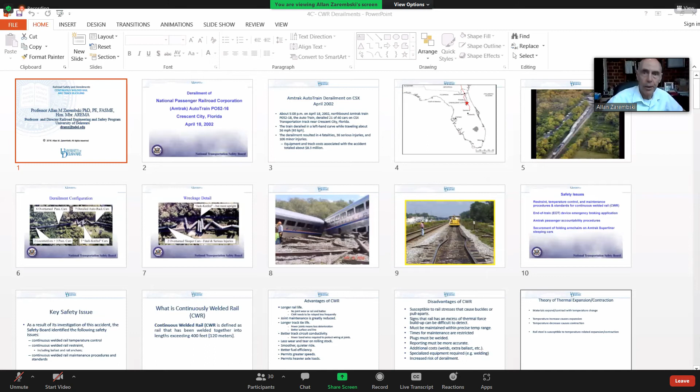So the last item I want to talk about, and an hour won't give it justice, but I'll try to introduce you to it, is continuously welded rail and track buckling. I showed you the movies earlier, so I won't review them, but I'll talk about the maintenance of continuously welded rail, which is a big deal throughout the world, but becomes especially significant in places like Israel because of the temperatures and generally warm weather.

Just to get things started, there was a major track buckling derailment on Amtrak in Florida back in 2002. Like many track buckling derailments, it happened in the middle of the afternoon in the spring. Unlike the normal expectation that you get most track buckling on the hottest day of summer.

Very often we find the most track buckles occur in spring because you've just gone through a winter cycle. People have done maintenance and haven't readjusted the track to account for the proper temperature for laying the welded rail. It's very common to have derailments in spring or early summer, and 5 o'clock on a spring or summer day is still pretty much in the heat of the day.

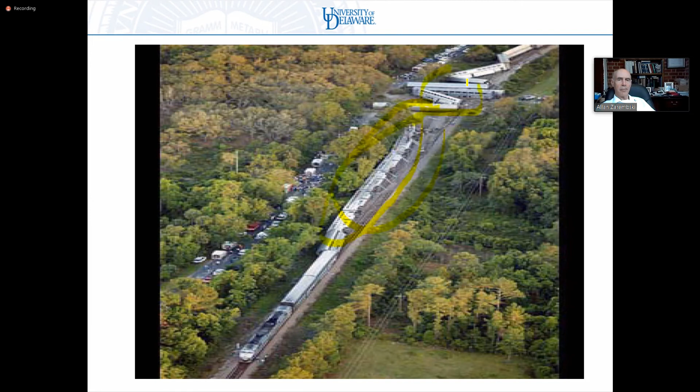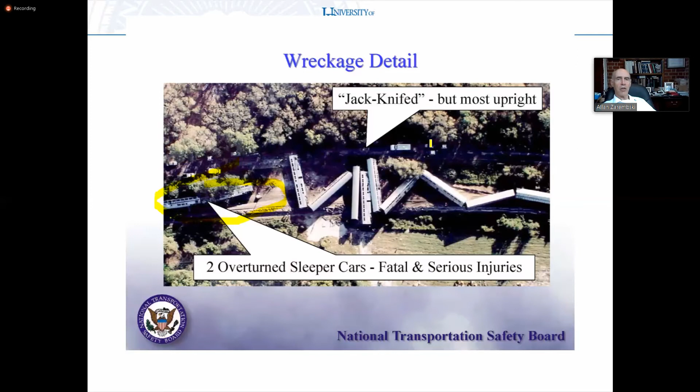Again, the fatalities were in this overturned sleeper car. As we talked about before, when a car goes over the side, that's when you get most of the injuries. If the car stays upright, you get fewer injuries.

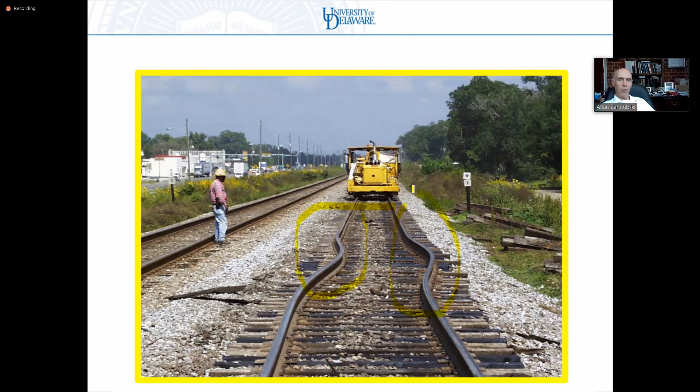A track buckle is a lateral misalignment of the track due to high thermal forces. I'm going to come back to this after we talk a little about CWR and what the issues were, but the main issue was maintenance procedures and maintaining the proper neutral temperature of the rail and any maintenance done on the track.

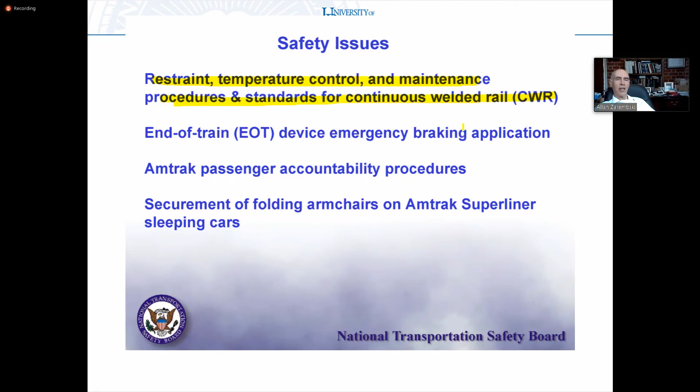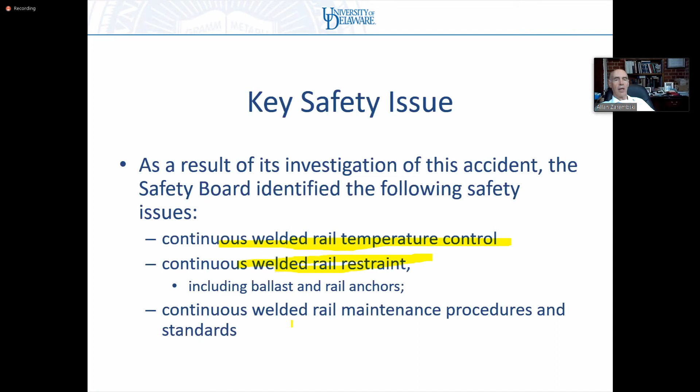That was the big issue here. Everything else was secondary, having more to do with what happened after the derailment. In this particular case, we're going to talk about rail temperature control, restraint of the CWR both lateral and longitudinal, and maintenance of CWR. Those were the big three issues that came out of this accident.

So let's start with what continuously welded rail is. There are all sorts of definitions out there. One of the more commonly accepted definitions is rail welded together in lengths greater than 120 meters. That's a pretty common definition around the world, but it doesn't really matter much - it's whenever you start welding rail together. In fact, we're at the point now where we can roll rail in 100-meter lengths, as you saw from the movie I showed earlier in the class.

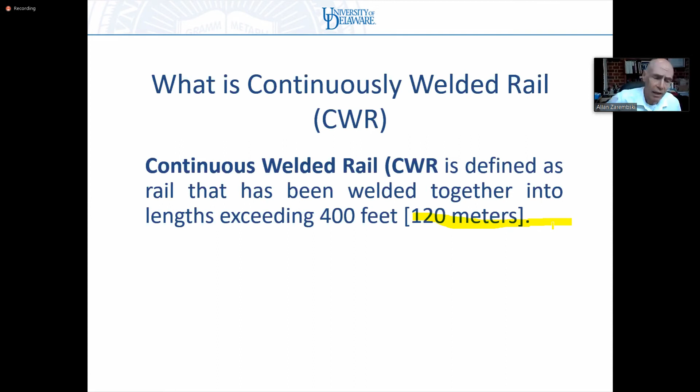Getting hoarse from talking. Can you all hear me okay? Should I put a microphone on? No, it's okay, you can hear me? Okay, if my voice starts to fail, let me know when I can switch to a microphone.

So given the fact that CWR is a pain in the neck to maintain, which it is, why do we want it? Well, continuously welded rail gives us longer rail life. Why? Because if I don't have welded rail, I have joints, and with joints I have a lot more maintenance, failure, and problems. Joint defects are the most common type of defects in jointed track.

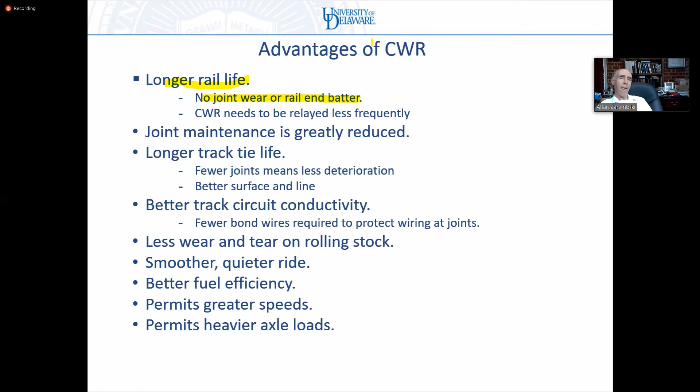Rail end batter, which I showed you pictures of in a previous class, all happens on jointed rail. The life of the rail is significantly shorter for jointed rail. Given that the price of rail is on the order of $400,000 to $500,000 a kilometer to replace - material plus labor plus installation, and for metros it's even more because metros are very expensive to replace rail - having as long a life of rail as possible is a major advantage. And of course, joint maintenance is reduced, which is a big maintenance issue.

Longer track life. Not only does the joint cause problems with the rail, it reduces sleeper life, and as I showed you last week, it can show all sorts of geometry degradation. So you have track maintenance, you have sleeper maintenance.

For example, you can't even put concrete sleepers under a joint. Let me say, you shouldn't put concrete sleepers under a joint because the concrete sleepers will be battered to pieces by the joints. You can only use concrete sleepers in welded rail. Wood sleepers you can use in a joint, but their life is less.

You have less signaling problems. You don't have to worry about playing around with bond wires and conductivity and track circuit connections at joints, because the CWR is just a piece of rail.

Less wear and tear of rolling stock. The same dynamic forces that cause track degradation also go up into the rolling stock and cause degradation of the rolling stock. We're going to talk a lot about that in January when I come back, about dynamic loading up on the wheels and track and car body and things like that. But joints cause all sorts of maintenance.

Smoother, quieter ride. You don't get the clickety-clack, clickety-clack. Most of you are probably not old enough, and you probably didn't have the opportunity because Israel Railways didn't really have that much jointed track. But in the olden days, when you took a train ride, you constantly heard this clickety-clack, clickety-clack, and that was the wheels going over the joints. You get a much smoother, quieter ride with welded rail.

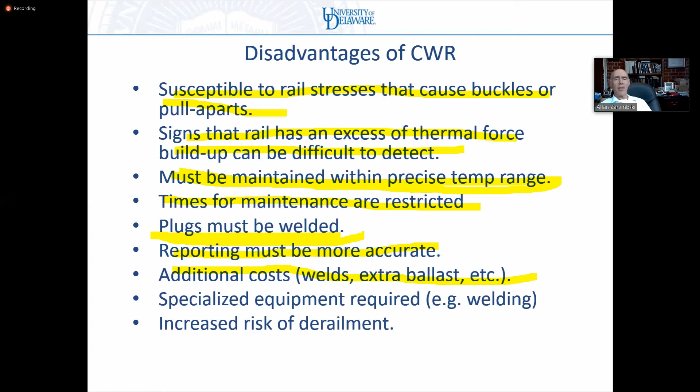But that's made up by the life cycle cost. It requires specialty equipment, particularly for the welding.

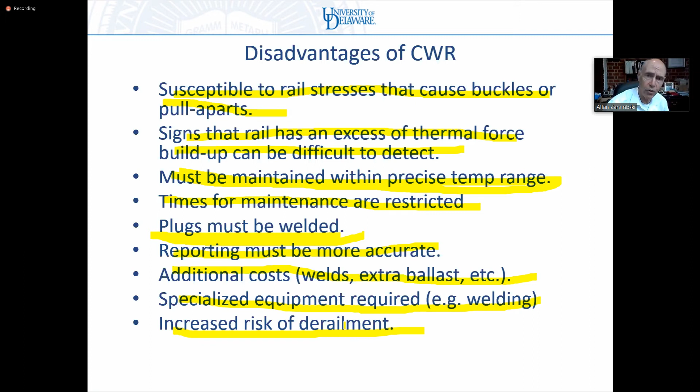And this says increased risk of derailment. That really is a part of buckles and pull-aparts. I'm not sure I believe that, because joints have their own increased risk of derailment due to joint failure. So that's probably a wash.

Okay, so we already talked about the theory of expansion and contraction. I'm not going to go over that in any great detail. You have a piece of rail, it gets cooled, it contracts; it heats, it expands, except if I lock it in place. So if I lock this rail in place by welding it in place, if it gets cold, I get tension. If it gets hot, I get compression.

Why? Because the rail here wants to contract and can't, so it's basically pulling on the edges and causing tension. And here it wants to expand and it can't, so I get compression.

The rail temperature at which I lock that rail in is the neutral temperature, or the force-free temperature. We talked about that previously.

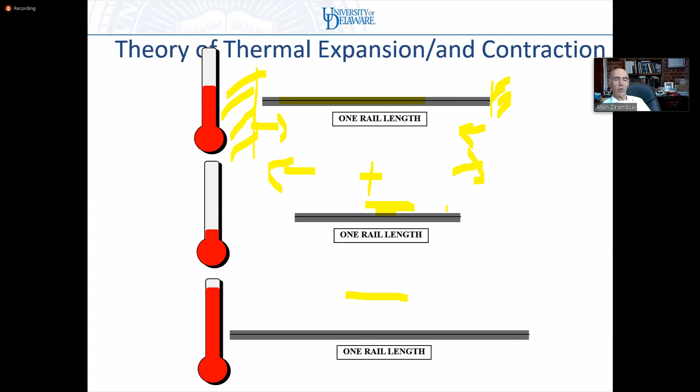And the rail temperature at any given point in time is the temperature of the rail, which is approximately 20 to 25 degrees centigrade greater than the temperature of the air, and that's if you're in the heat of the sun.

So the formula for thermal expansion, we went over this in a previous class: the change in length is alpha, the coefficient of thermal expansion, times the change in temperature, times the length of that rail.

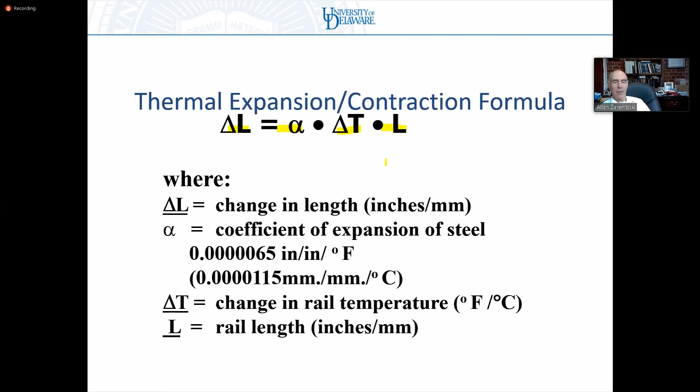I'm not going to go through the examples. We've been through this. You can look over this on your own if you like.

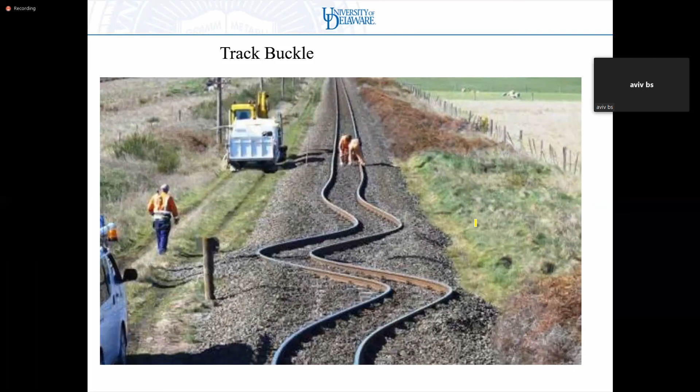Is there another option for CWR, for welded rail? What do you mean? I don't understand the question. Welded rail, we use welded rail in order to connect rails. Is there another option to connect rails? Yes, there is a third option.

Well, you can use joints, which have a gap that allows for expansion and contraction. You can weld it, or in very special cases, you can use expansion joints. So an expansion joint is basically: I have a piece of rail here, and another piece of rail over here. I have the track going to one expansion joint, and the track going to the other expansion joint, and I literally have an overlap between my two ends. So I can actually expand or contract at these expansion joints.

Where you'll see expansion joints often is on bridges, specifically very long bridges. I'll get to this a little later, but it's a very expensive and difficult to maintain option, so it's not commonly used. The short answer to your question is right now you either have welded rail or jointed rail. There's no third choice—you can use expansion joints, but there's no real third choice.

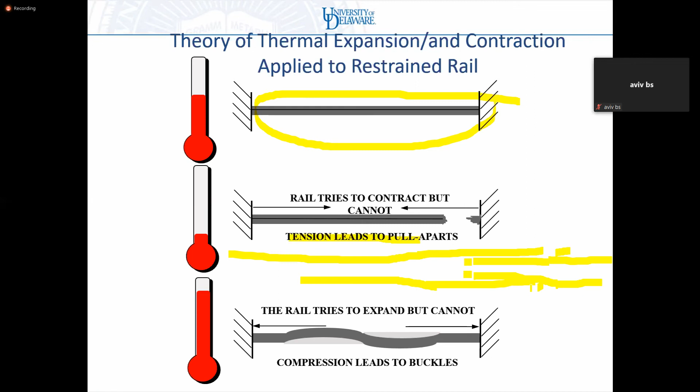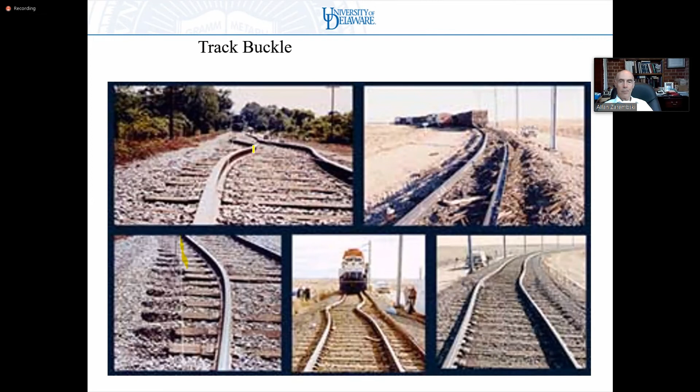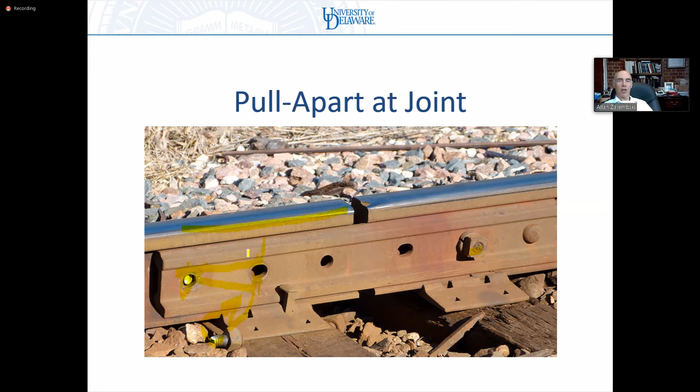The force-free temperature, as I indicated, is the temperature at which the rail is completely free of internal forces. Usually when you lay rail initially, the force-free temperature is the laying temperature of the rail. So if you lay the rail at 30 degrees C, the force-free temperature is originally 30 degrees C, but over time that force-free temperature decreases, and you usually don't know what it decreases to. Trying to find out what the force-free temperature becomes is a really difficult problem—it's possible, but a very difficult process.

So again, I'm going to skip through these problems. You can go through them at your leisure, but I think we went through some of these already, so I'm not going to spend a lot of time. I really want to get into maintenance of CWR.

Force, again, is EA alpha delta T. E is the modulus of elasticity. A is the cross-section of the rail. Alpha is the coefficient of thermal expansion. Delta T is the difference between the rail temperature and the force-free temperature. So delta T equals temperature of the rail minus force-free temperature.

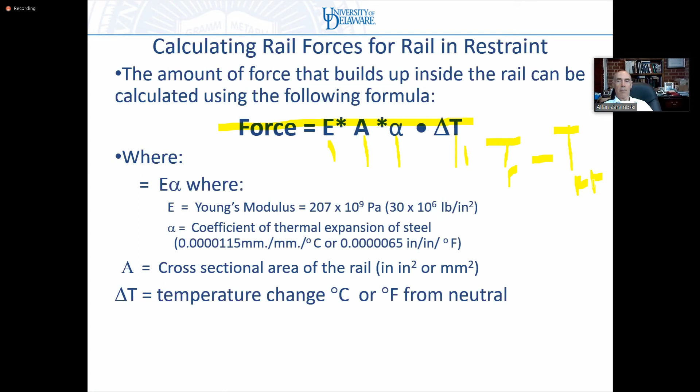Again, you should have all had this before—I've gone through this. Rail force can generate very significant forces. Here, a 50 degree C temperature change will give you 100 tons per rail. So if you're on a bridge with 4 rails, that's 400 tons.

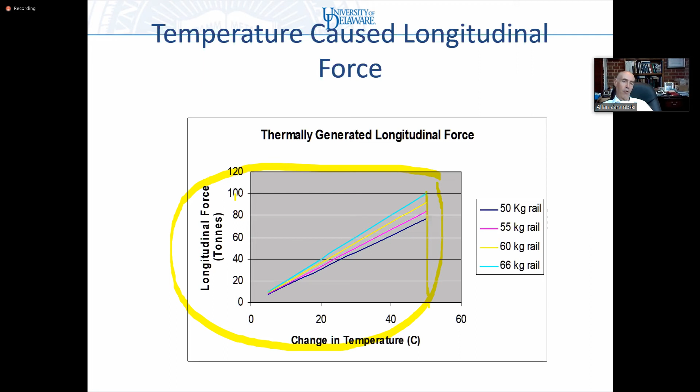Again, track buckle. Okay, so let's talk a little bit about track buckling and a little bit about buckling theory, so you can understand the mechanism behind track buckling.

Basically, what happens, let's see if I have the next slide here.

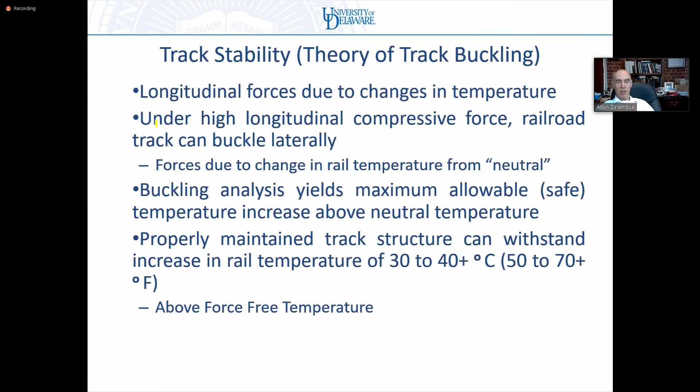So I have a piece of welded rail with a couple of joints in between. Let's say this is 1,000 meters, a kilometer. This end here is about 20 meters, and this end here is about 20 meters, and in between is about 960 meters. This end is free, so there's no force in there. It builds up the force because each fastener has longitudinal restraint. So each sleeper takes a little bit of longitudinal force until I get to my maximum force, which is EA alpha delta T. Then most of my track has this EA alpha delta T of longitudinal force.

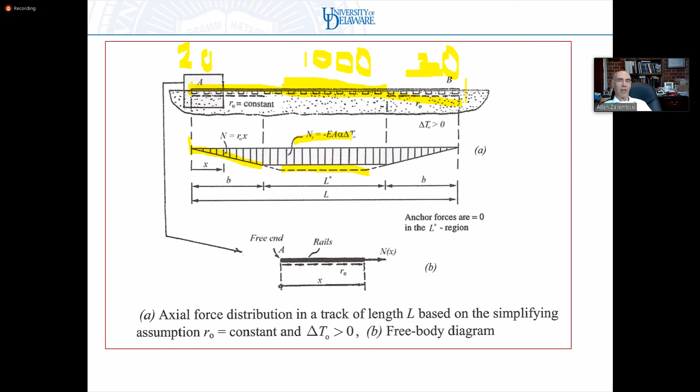What happens? This is a plot that shows my increased delta T. So everything now is delta T. Every time we think in terms of track buckling or track pull apart, the important temperature is not the actual temperature itself, either the rail or the ambient. It's the difference in temperature between the rail temperature and the force-free temperature, delta T. So as delta T increases...

I have the potential of the track popping sideways. In fact, in what's called classical Euler buckling, if you just have a column and you keep loading it, what happens is you keep increasing your longitudinal force, which in this case is EA alpha delta T, until you get this critical point, and then it buckles out sideways. So this is load, this is deflection. Here it buckles out sideways. This is the deflection equals zero point.

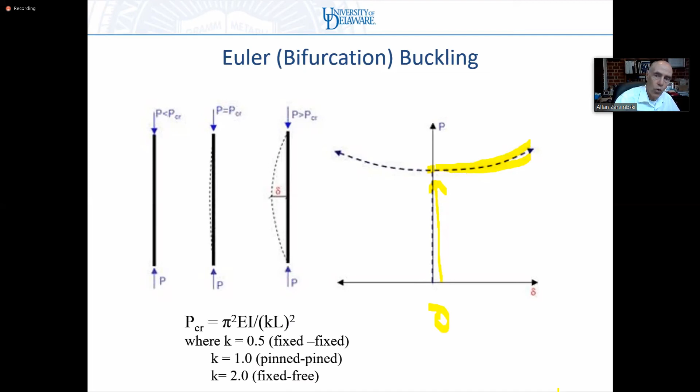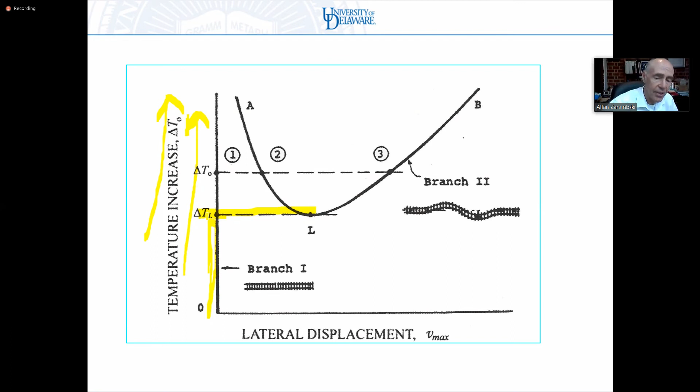In railroad track, it's a little bit more complex, because as it reaches this first level, delta T sub L. So I have three states of buckling in the track. If my delta T is less than delta T sub L, it will never buckle. It's always stable. So I always have to have a delta T less than delta T sub L. We'll talk a little bit about what that value is in a moment, but it varies depending on my track structure, the amount of ballast, and the kind of sleepers I have. So there's no one number here.

Between delta T sub L and delta T sub 0, there is an alternate unstable and stable state. So I can have what's called snap-through buckling. I can go through here and then my track can buckle out. Remember that movie that showed the track and then all of a sudden it just kicked out? Well, that's what happens here. You go through and you get the snap-through buckling, between delta T sub L and delta T sub 0. In this zone, there's a probability or a risk of buckling, but there's no guarantee of buckling.

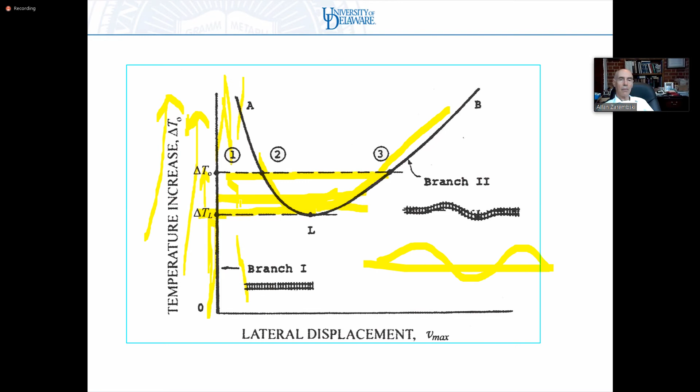In this zone, greater than delta T sub 0, the track will buckle. So I have a zone where I never buckle, a zone where I will buckle, and a zone where I might buckle, depending on the total energy involved in the system. Those are the three states we're talking about.

So once I buckle, remember my constant longitudinal force? In my buckle, because I've now expanded, what happens to my force? My force decreases, right? Because I've released some of the force, not all of it, but some of it. So my longitudinal force in the buckling zone is less than my longitudinal force out here, which is still EA alpha delta T over here and over here. And then I have a transition zone where I go between the two.

Now it's really, really important to remember that when I buckle, I still have some force in there. Why? Because let's say you have a maintenance crew going out there trying to fix that buckle. The first thing you got to do is cut the rail out. Well, if you go in there fat, dumb, and stupid and cut that rail, because there's a longitudinal force in there, that rail is going to whip around and hit maintenance workers and probably kill them, because rail is a pretty rigid, strong component.

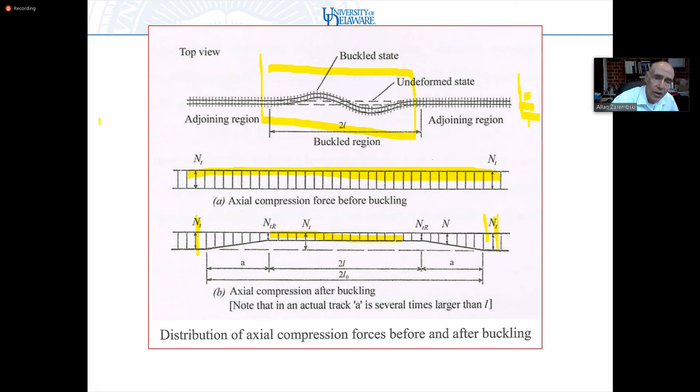60 kilogram rail is 60 kilograms per meter, and you're dealing with maybe 100 meters of track here. So you're dealing with a ton of rail bouncing around. There are a lot of precautions you have to take. I'm not going to get into all of the maintenance issues here, but I do want to point out that even when you buckle, you have some residual longitudinal force in that rail.

So even in this situation, if you try to come in there and cut the rail here and here, you've got to do it real carefully to make sure that rail doesn't move on you.

Track buckling can be either symmetrical or asymmetrical.

By the way, a good reference for this - I think I've mentioned it. There's a textbook by Arnold Kerr, Fundamentals of Railway Track Engineering, from around 2005. I gave it to you in the very first class, and also when we talked about beam and elastic foundation analysis - I gave you a picture of the book. He does a wonderful job talking about track buckling.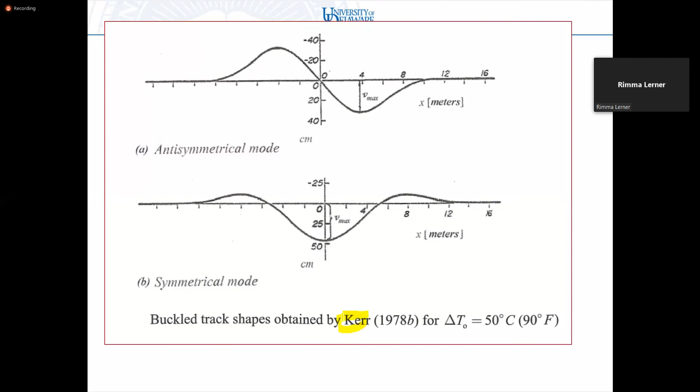Alan, sorry, a question. About cutting the rail - I need to wait until the temperature is lower and then do it, right?

Well, at that point in time, you can, but usually you never cut the rail in the heat of the day. You don't want to cut the rail in the heat of the day - you want to wait till the temperature goes down. If you have that luxury, that would be better. But you always have to treat the rail as if there's some force in it.

Even if you have to, you've got to respect that rail - even if it's at the force-free temperature?

If you know what the force-free temperature is - but the odds are it buckled because you didn't know what the force-free temperature is, because it changed from when you laid it. That's one of the problems with CWR. You can lay the rail at a given force-free temperature, but it can change, and it usually goes down. So if you lay it at 30 degrees C and come back 3 or 4 years later, it can be at 25 or 20 degrees C, and you don't know. That's why it buckled - the change in temperature was more than you thought.

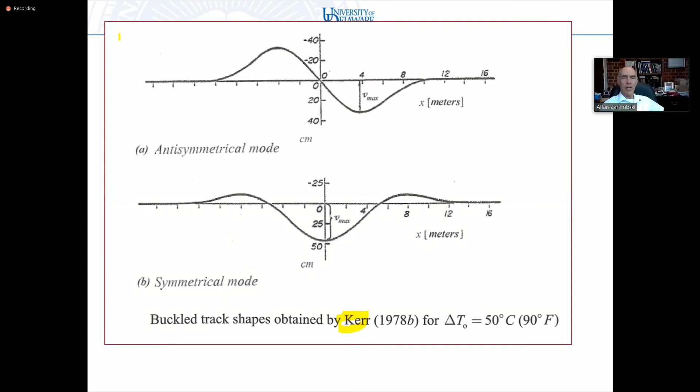So you can see the two modes of buckling, symmetrical and antisymmetrical. Here's a nice picture of them. This is a symmetrical mode, this is an antisymmetrical mode. They both cause derailments.

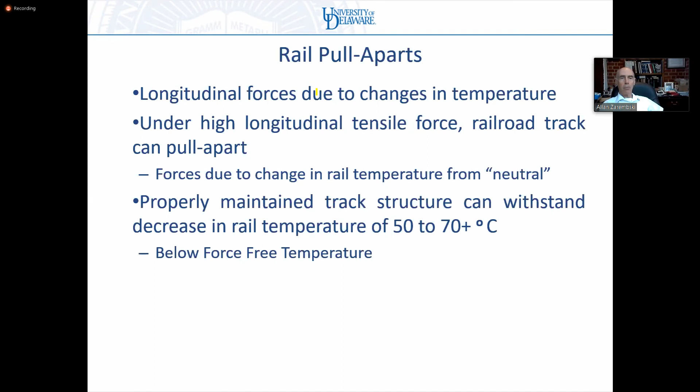Another thing that happens is when you're doing ultrasonic testing in the winter, when the rail is in tensile stress, you're actually going to find more defects than in summer. It's a statistic we've seen time and time again. The reason is in winter the rail is in tension, pulling apart the rail internally and opening up the defect to ultrasonic inspection. Whereas in summer, when the rail's in compression, the defect is sort of closed a bit, so it's harder to find.

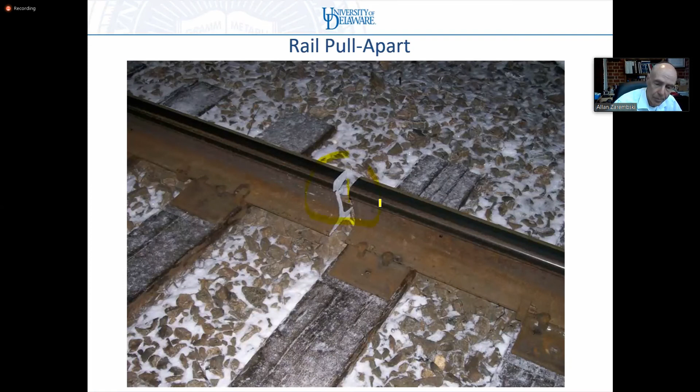There's a pull apart at a joint - I showed you this picture already. If you have a pull apart, the force goes all the way down to zero, because once this is moving or opened up, there's no more force here. So it's usually no problem to cut here and here, because there's very small force, unlike a buckle. That's what we see over here - after a pull apart, the longitudinal force goes all the way down to zero.

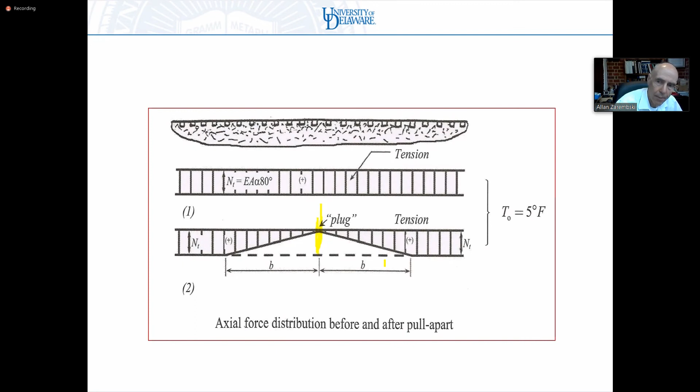Again, I'm not going to go through this. This is an example of the force here. You can see this is a calculation, and we calculated about an 85-ton longitudinal force due to a temperature change. What was the temperature change? About 38 degrees C.

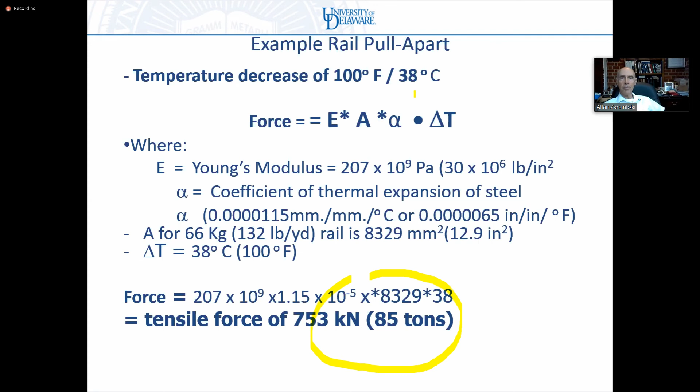One of the places where we also see pull apart problems is places where there's some sort of damage to the rail. So here, this is a case where I had a pull apart in girder rail. This is an interesting case, so I'm going to mention it. I'll tell you what you should never, never, never do.

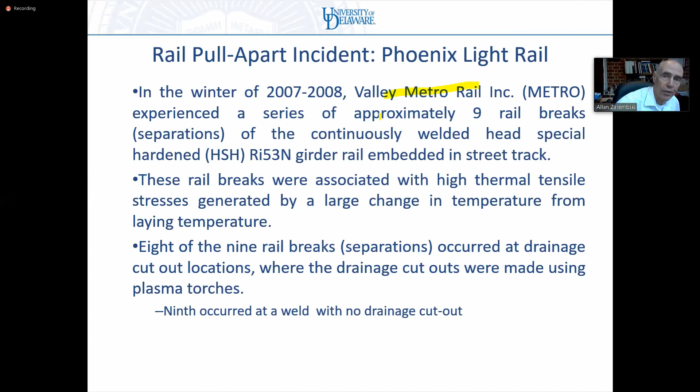Okay, so this is a Metro, Phoenix, Arizona. I was actually called in on this one as well. They had 9 pull aparts within a month. It was all in the winter, of course, because that's when you have the coldest weather, right? 8 of the locations, so this was the girder rail. It was an Ri53N. I think it was an Ri53N section, if I remember correctly here.

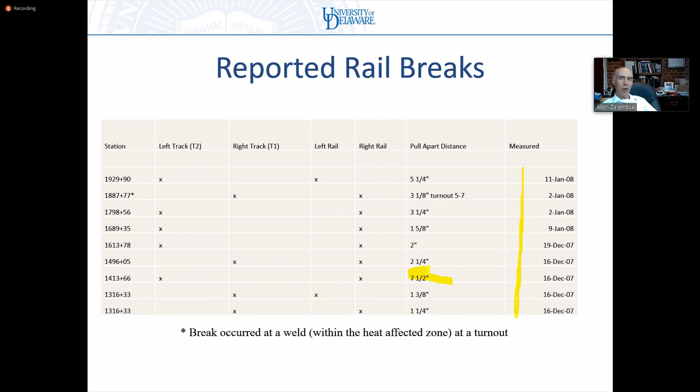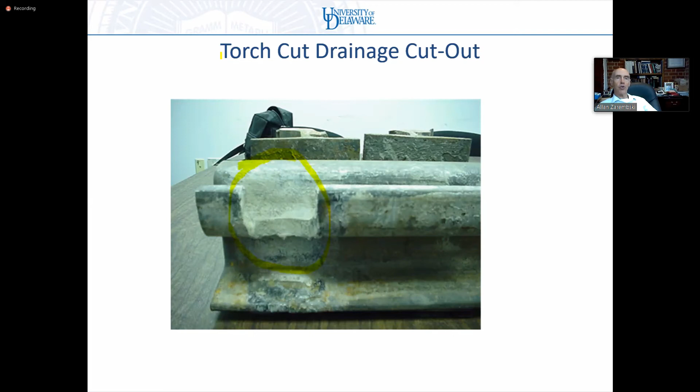Now, about 70% of these pull aparts happened at a place where the Metro wanted to torch cut some drainage holes into the girder rail, and they used a torch. And remember, I said this in an earlier presentation, you never, never, never torch cut anything in the rail because you generate such a high stress concentration factor with the torch cuts that you're going to fail. Plus, you change the steel. You introduce a residual stress due to the heating of the torch.

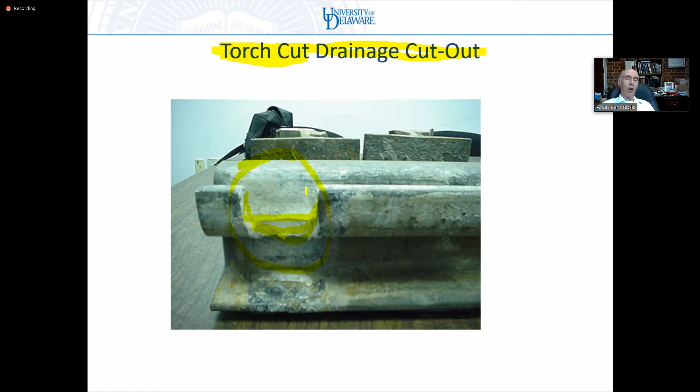So you have a double whammy. You have a very rough surface, which has a stress concentration, and you have a metallurgical change as well. In this particular case, they torch cut a hole in not all of them, but I think about 70% of them, and they failed there. In the other ones, they did not torch cut a hole, and it just failed normally because of the situation. This is where they didn't torch cut the hole. I think this is where you just had a pull apart.

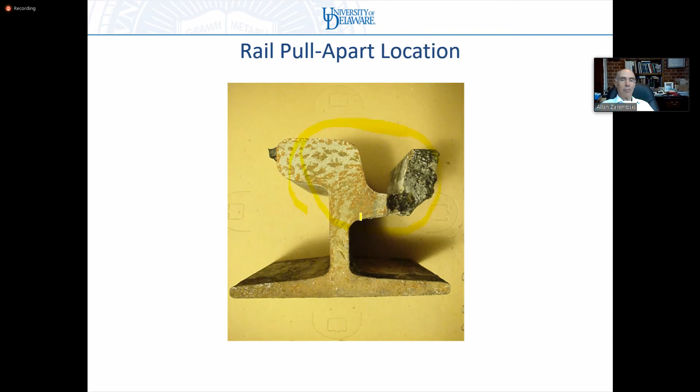So what happened here is that the original spec had the rail being laid at between 50 and 60 degrees Celsius, centigrade. I'm not going to go through all the analysis. In reality, what happened, they laid it at about... there was a very hot spell. No, I'm sorry, I take that back. The spec originally was to lay between 40 and 50 degrees, and they ended up laying it between 50 and 60 degrees. And so in the winter, they had a temperature change of 55 degrees centigrade, delta T.

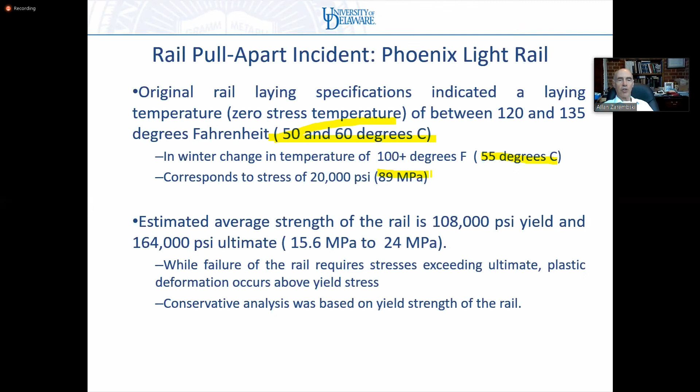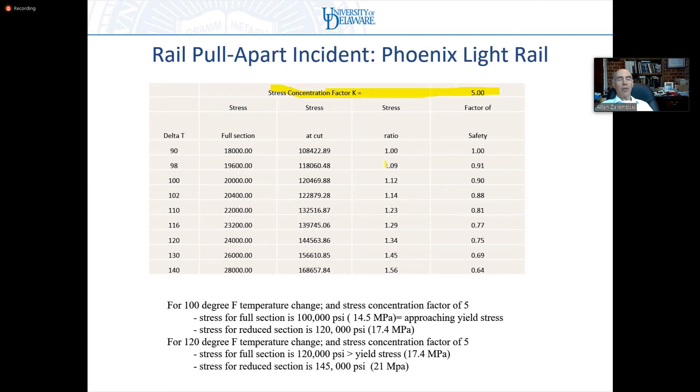So they generated about a thermal stress of about 90 megapascals, just due to the thermal stresses alone. So what happened here is that there was a stress concentration. I'm not going to go through the discussion. There was a stress concentration of about 5 due to, in this particular case, the torch cutting. And so all of a sudden the stresses went up from about 90 megapascals up to about 450 megapascals, which were actually above the endurance limit, sorry, above the ultimate strength of that rail, and so they failed.

Now, as I mentioned, the longitudinal force-free temperature changes with time. There are some techniques that are out there, mostly involving putting strain gauges on the web of the rail to monitor the longitudinal forces. The problem is they have to be installed at zero stress. So that means you have to cut the rail, install the measuring systems, and then reinstall the rail. So they're fairly difficult to do.

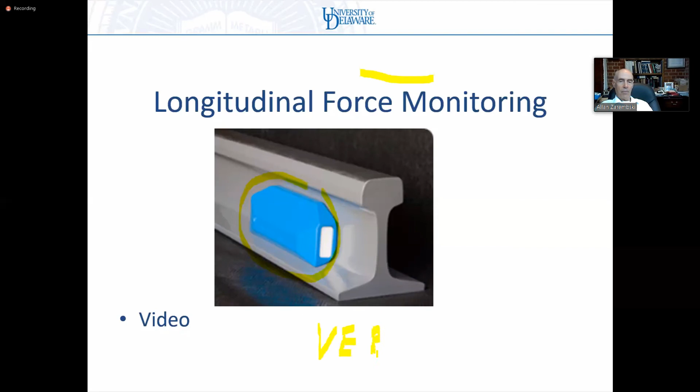There is a system called the VERSE, where you don't have to cut the rail and you can measure the longitudinal force. What the VERSE system does, so I'm looking at the side of my track. So here are my sleepers, my rail. If I disconnect about 10 meters of rail from the sleeper, so I remove roughly 10 meters of rail from the fasteners, the VERSE system pulls the rail up and measures the deflection. And by looking at the relationship between the rail size, the amount of force it takes to pull up the rail, and the deflection, it can actually calculate the force-free temperature or the neutral temperature of the rail. So that's a technique that is also out there commercially.

This is one technique, this is the other.

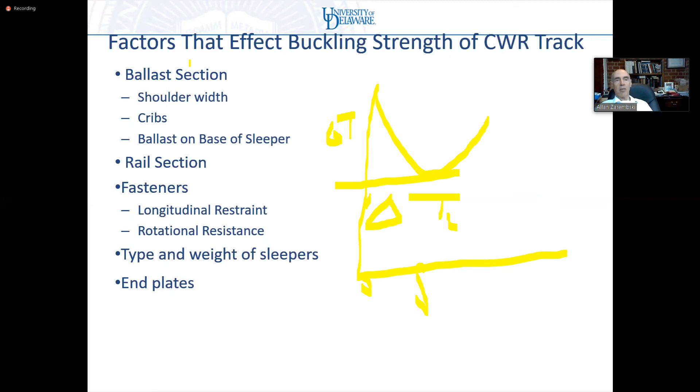Well, it's a fairly complex calculation, but what's really important is what it depends on. It depends on my ballast condition, the lateral resistance of my sleeper, which is a function of the shoulder width, the cribs, the filled number of cribs, and the ballast in the base of the sleeper. My longitudinal resistance to the sleeper is a function of the cribs and the ballast ridge.

Did everybody remember what a crib is? Crib is the space between sleepers. I have two different sleepers, and this area is my crib. If it doesn't have ballast in it, then I have reduced lateral and longitudinal resistance, and my delta T sub L goes down. My risk of buckling increases.

So my delta T sub L is a function of my ballast resistance, lateral and longitudinal, my rail section, my fastener restraints, the type of fasteners I have, the type and weight of sleepers. Concrete sleepers weigh about three times the weight of timber sleepers, so they're actually more resistant to buckling than timber sleepers.

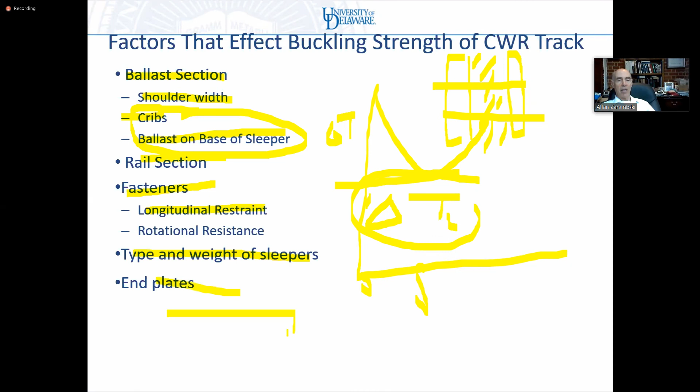The use of end plates at the end of my sleeper gives me increased ballast resistance. So if I have shoulders over here, and I put an end plate in the end of the sleeper, that'll give me increased lateral resistance. All these affect my delta T sub L, my lateral resistance.

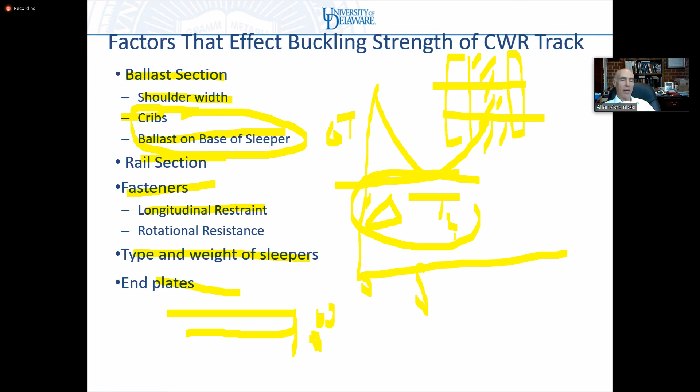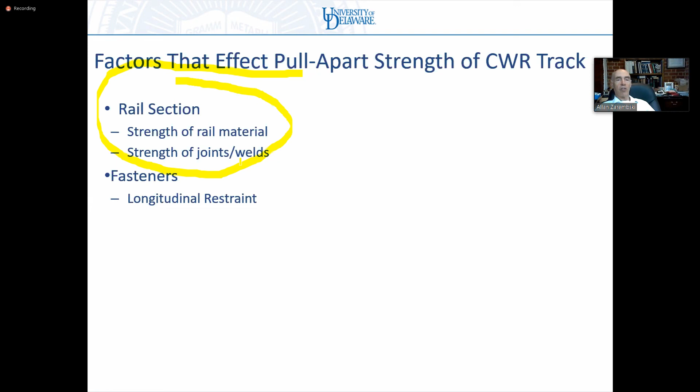Factors that affect my pull apart strength are a little bit more limited. There's the rail section and material, the strength of my joints and welds, and also my longitudinal restraint of my fasteners, all affecting my pull apart strength.

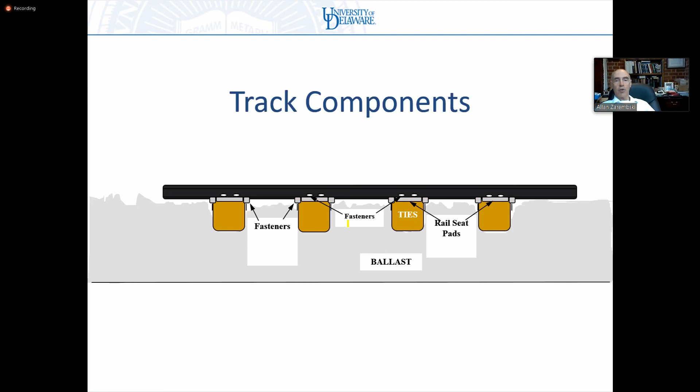So I have longitudinal resistance effect, which is the fasteners and the ballast, and I have the lateral resistance effect. Lateral resistance is a function of my shoulders, my cribs, the ballast underneath my sleepers, the type of fasteners that I have, and things like the type of sleepers I have.

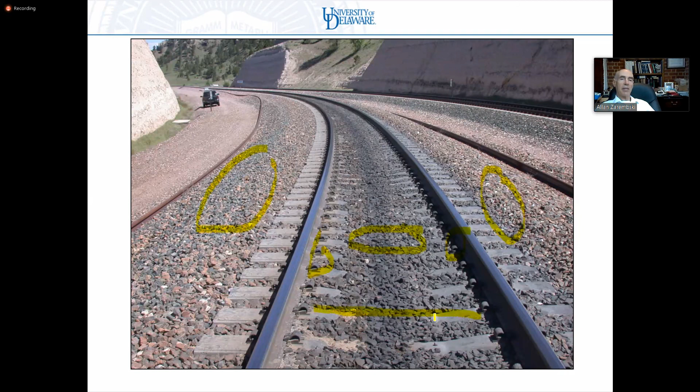Here's concrete sleepers. This is a really good, well-maintained ballast section with good lateral and longitudinal resistance. Here's another example.

There are actually techniques for measuring the lateral and longitudinal resistance of the track. Basically, the most common method is what's called the single tie push test, where I take a sleeper, disconnect it from the rail, apply a load along the axis of the sleeper and track, and I measure the load and displacement, and I get a load displacement curve as I see here.

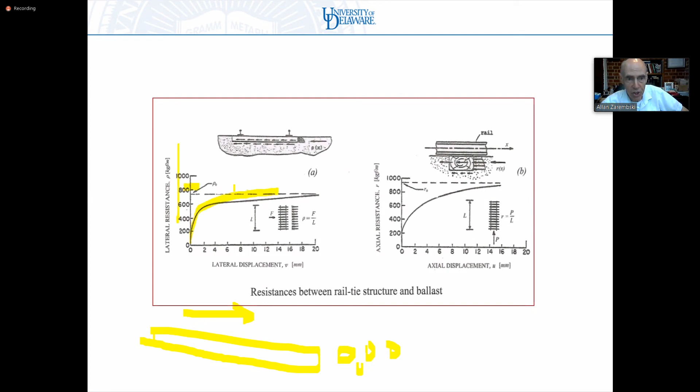The lateral resistance is defined as the asymptote of this curve. So this is the load displacement curve laterally that I get, and this is the asymptote. In this particular sleeper design, the resistance is about 800 kilograms per meter, lateral resistance.

Longitudinal resistance, I would disconnect the sleeper and load it longitudinally. Again, I get a load displacement curve, and I define the longitudinal resistance by this asymptote.

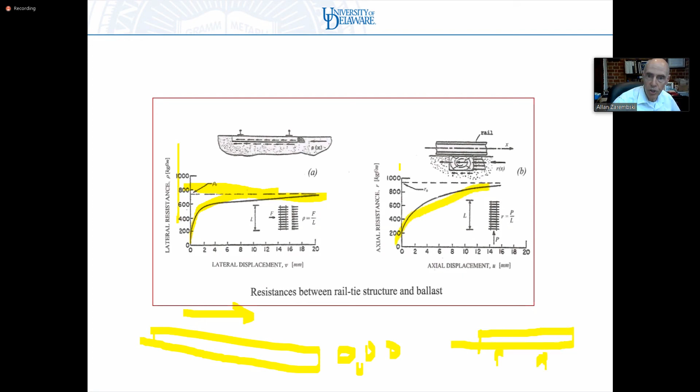We talked about fastener longitudinal restraints. I think that should be covered elsewhere. Generally speaking, fastener longitudinal restraints have the order of 11 to 15 kilonewtons per rail seat.

So again, remember, this is how you build up your longitudinal resistance. If I have a joint here, then I have zero longitudinal force here, and my longitudinal force builds up this way. Here's my rail, here are my sleepers. My longitudinal force, if I want to plot it, is actually going to look like this.

I have zero out here. My first fastening system, about 11 to 15 kilonewtons per rail seat. My second one, now I'm up to 20 to 30 kilonewtons. Now I'm up to 40 to 50 kilonewtons. Now I'm up to 70 to 100 kilonewtons. By the time I go about 50 to 60 meters, I can generate a longitudinal force of 110 tons.

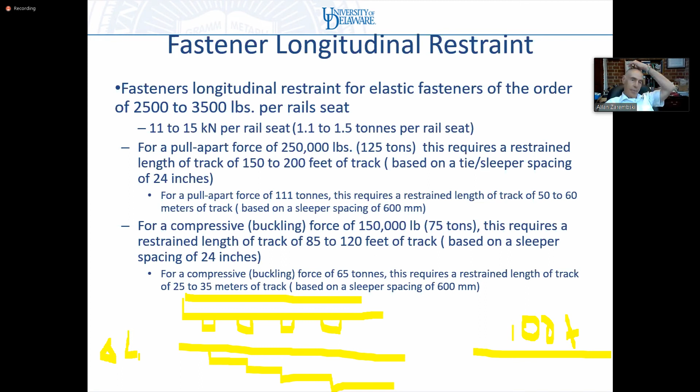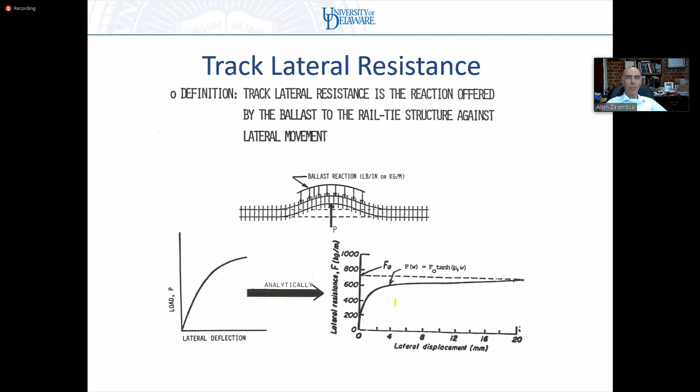Track lateral resistance. Maximum benefit of track lateral resistance, which is one of your key criteria to buckling, is adequate tie end, shoulder, bottom, and crib resistance. That's probably the single most important thing you really want to do.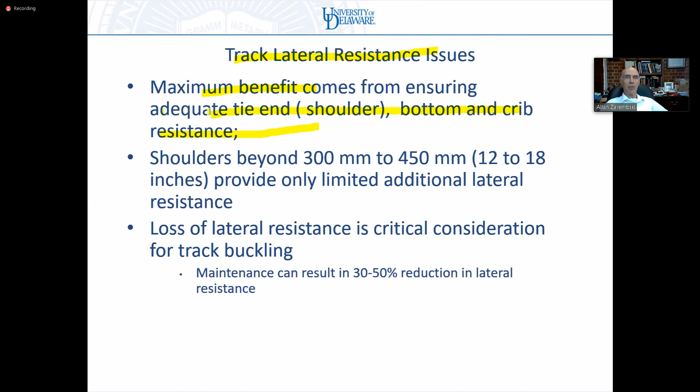You want shoulders to be of the order of 300 to 450 millimeters. Minimum shoulder width of 300 millimeters. Welded rail should never have shoulders less than 300 millimeters. Again, remember, shoulder is the ballast at the end of the sleeper. Minimum should be 300 millimeters, never less.

And well consolidated ballast. Now, what happens if I come in and I tamp my ballast? If my benefit comes from good ballast holding my sleeper in, what happens if I tamp my ballast? If I tamp my ballast, I can reduce my lateral resistance by about 30 to 50%.

So here's a good example of lateral resistance. Here's very well consolidated, really good ballast, 300 millimeter shoulder, 5-degree curve. My lateral resistance is between 14 and 17 kilonewtons per meter.

I take the same track. This is a slag ballast, so let me compare apples and apples. Here's a slag ballast, which is a poorer quality ballast, about only 0.125 MGT consolidation. Again, 300 millimeter shoulders. My lateral resistance is about 10 kilonewtons per meter. But if I just tamp that track, my lateral resistance drops down to about 5 kilonewtons per meter. So it drops to about half of the consolidated value and a third of the value of really good ballast well consolidated.

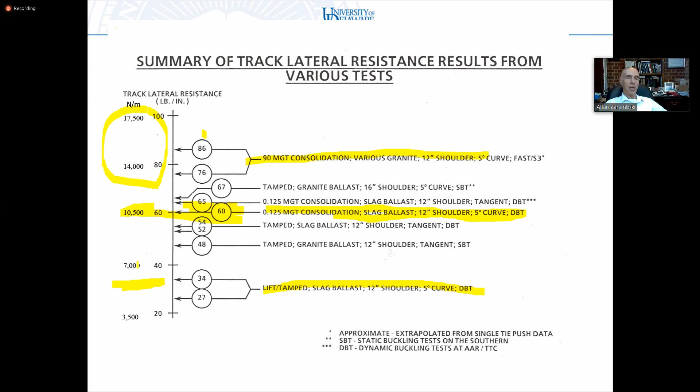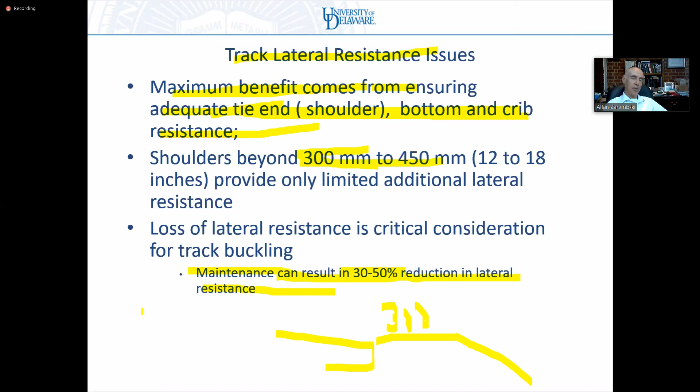So one of the issues I have with maintaining CWR track is I have to be really careful what happens when I maintain my track. If I do tamping, I do maintenance, I reduce the lateral resistance of my track structure.

Here's another example, actually a better example, I should have used this one earlier. This is my load deflection curve for concrete sleepers, well consolidated before maintenance, and this is the same track after tamping. Again, you see the lateral resistance drops by a factor of 2.5.

So it's even more important to maintain a good level of consolidation. What is buckling prone? Buckling prone.

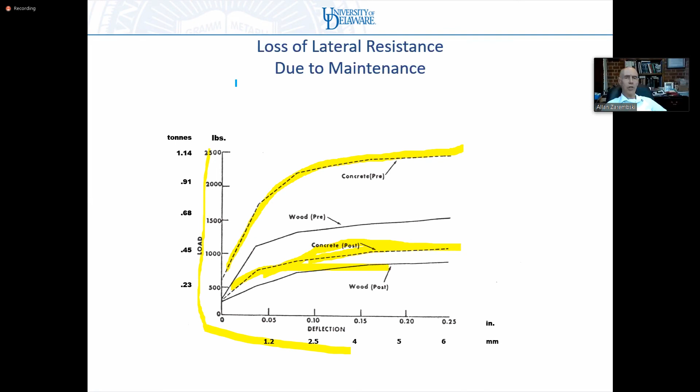So care must be taken to avoid disturbing lateral strength of track structure. I said there were limitations on when you can do maintenance. If you have CWR track, you can't do tamping in hot weather, because if you disturb the track in very hot weather, when you have a high compressive force, you can buckle.

And even after you disturb the track, you need to allow the ballast to consolidate. How do you consolidate ballast? You consolidate ballast by running trains over it. You can also use an external consolidator. There are machines that bring plates down on the top of the ballast and vibrate them. So in some railways, they actually use these consolidators behind the tamping or a surfacing gang to increase the lateral resistance of the ballast. But the most common technique is to slow trains down.

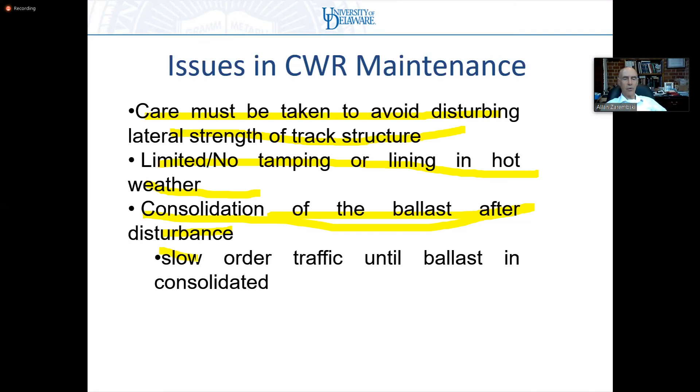So for example, here's a railroad standard I took from one major railroad in the US that basically says that if I had to replace ties, and I'm talking about cool weather, I need to wait 48 hours of traffic before I allow my track to go to normal speed. I'm reduced to 50 kilometers per hour for 2 days until I get speed. Other standards go to a certain amount of tonnage, MGT.

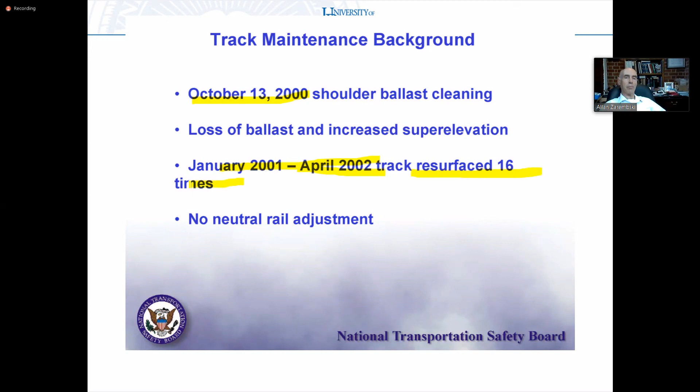So let's go back to the Amtrak derailment, which I think I'm going to end on because I want to make this point, it's really important. What happened? This derailment happened in April 2002. It turned out that between October 2000 and April 2002, there was an extensive amount of maintenance. Just between January 2001 and April 2002, the track was resurfaced 16 times without adjusting the neutral rail.

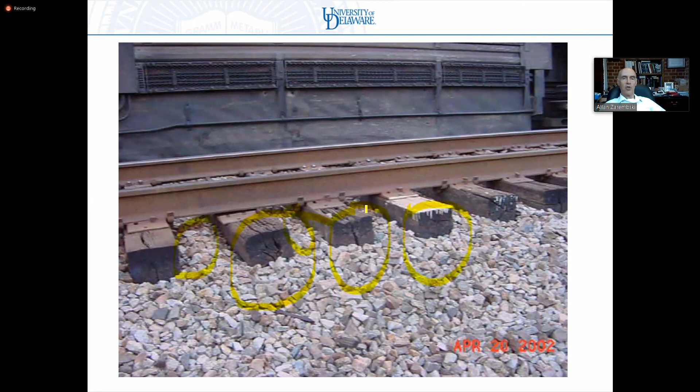So here's a picture of the ballast. Notice there's no shoulder ballast. Notice the sleeper ends are completely exposed. Also, there's no crib ballast. So this track was extremely weakened. Another picture.

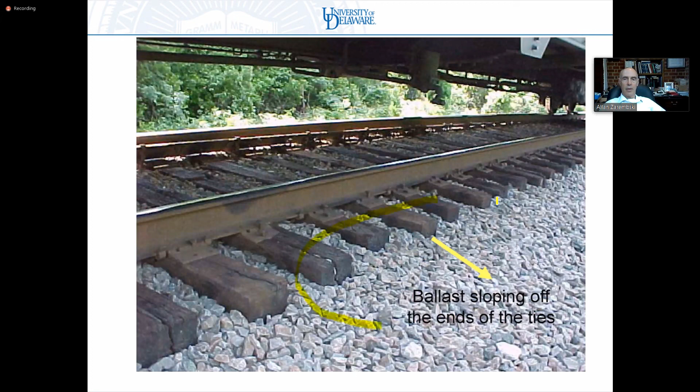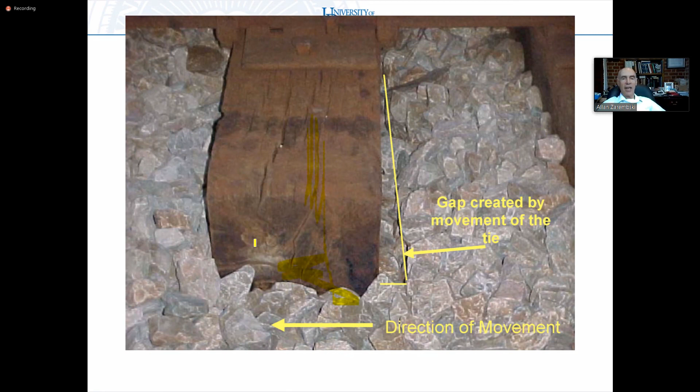You see the ballast is actually sloping off the end of the sleepers. Here you can actually see a gap between the sleeper and the ballast, showing that this curve was actually moving in and out, which happens in summer and winter. Because of thermal expansion and contraction, you can move the curve in and out with changes in seasons, and that can create a gap in the ballast, which reduces lateral resistance.

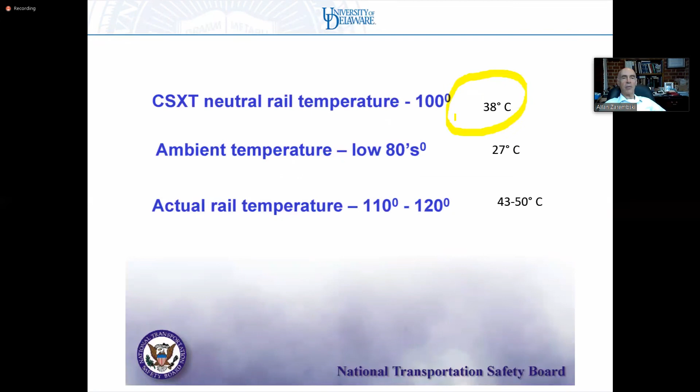The CSX rail was supposed to be at about 40 degrees C, and we think it was significantly lower because of that movement. In fact, this was the curve where the buckle took place, and you can see it took place in April 2002.

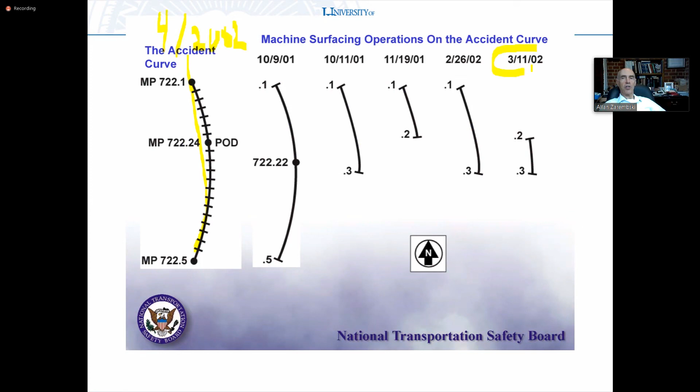You can see they actually did maintenance as recent as March 2002 in this zone, right in the zone of the buckle. So you've got to be really, really careful. There was another problem here as well.

The train engineer saw the buckle ahead of him and initiated braking action, which put a longitudinal compressive wave into the track and widened the defect. So that was a secondary, or related, problem.

I'm going to stop here because I really can't give this justice. I recently gave a course to an American railroad on track buckling maintenance and standards, and it was basically an 8-hour course to cover the material I tried to jump through here in about an hour. I just wanted to give you a feel for track buckling. Let me stop and see if there are any questions.

What is CSXT? That's a railroad in the United States. That railroad has about 40,000 kilometers of track, roughly speaking. So it's a big railroad, about the same size as the French system. Any other questions?